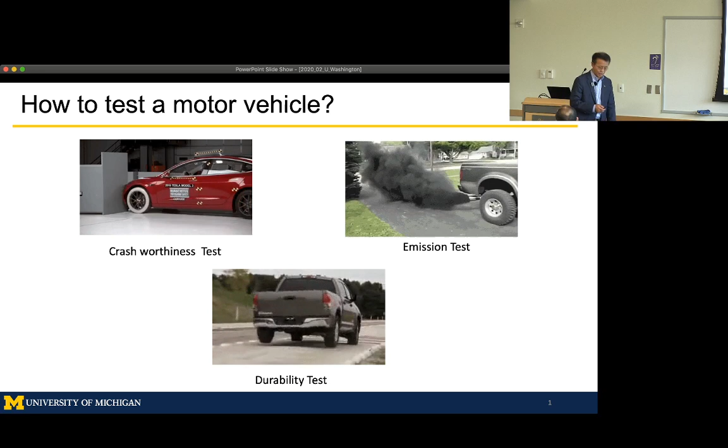At the same time, we also do driver tests, right? So for drivers, you first test your vision. Essentially, that's your perception system, and you need to know you have a good vision. You can see the objects on the road. We do written tests so that you know the traffic rules, so you have enough knowledge to guide you through the traffic flow.

And then the last one, you do have a road test, on-road test. So there's someone using a rubric that checks different things like parallel parking, turning, and things like that. So that's what we do in terms of driving performance evaluation and test. Now, think about automated vehicles. For automated vehicles, you don't have a driver over there, and now you want to put that automated vehicle into the traffic. Now, how are we going to do the test?

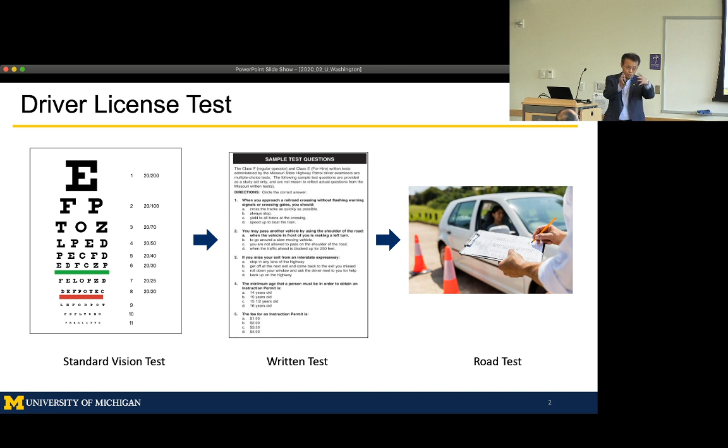So that brings the issue for automated driving systems. The ADS is a combination of the vehicle itself. There's still vehicle dynamics, vehicle characteristics associated with the car's mechanical systems. On top of that, we have this automated driving system, essentially replacing a driver and taking a driver out of the loop.

Now, when we talk about traffic flow, individual drivers really are the ones responsible for their own safety, mobility and things like that. But you don't have it anymore. You have this automated driving system driving in the traffic flow, whether this is all autonomous vehicles, or, particularly during the transition time, it could be a mixture of traffic flows.

So in terms of the test, not only do we still need to do the safety, the emission, the durability test of the mechanical system, now we need to test this automated driving system. And how are we going to do that? Are we going to do the vision test, the written test, the on-road test? How are we going to do that?

So the key of that is you need to put these automated vehicles, the automated driving systems, into a traffic context. So it's not just the vehicle itself. Because we're going to utilize this vehicle in a traffic flow, you need to test these vehicles in a traffic context. So this is very, very different from traditional vehicle tests, the test I was talking about.

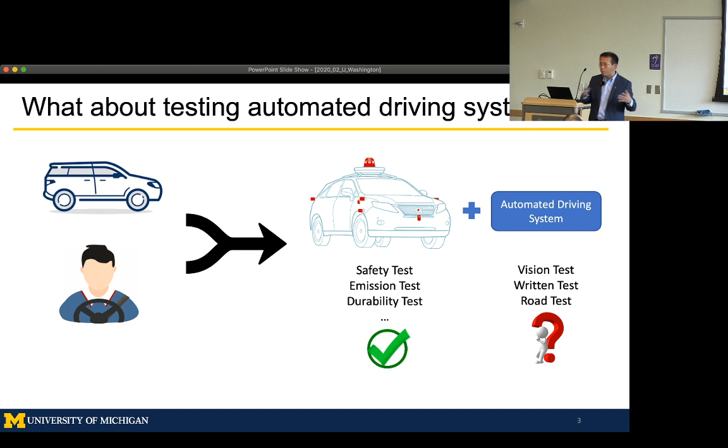I started this problem about 5-6 years ago when I joined University of Michigan, and I was one of the designers for the testing facility at the University of Michigan, and started to learn how we're going to do the test for autonomous vehicles. And I really found this is essentially a transportation engineering problem. There's a lot of knowledge from traffic flow theories that can be applied to the testing and evaluation of autonomous vehicles.

And I will show you some of that. So obviously, testing and evaluation of autonomous vehicles is important. Everybody is concerned about the safety and mobility of autonomous vehicles. I put down two of probably the most notable fatal accidents related to autonomous vehicles. You can argue in terms of the levels, but they are essentially being utilized as autonomous vehicles. One by Tesla in 2016, one in 2018 by Uber. They are highly automated driving systems.

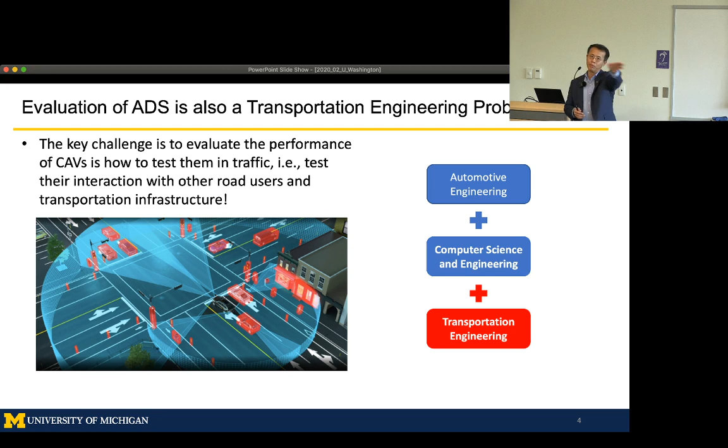So obviously, testing the safety, functionality, and mobility of these ADS is very important. How do we do the test, how do we assess these autonomous vehicles? Traditionally, I would say we have three established methods to test these ADS. First, by simulation. Essentially, you have a simulation model, you put your ADS into the simulation model, and this ADS will maneuver through the traffic flow, and you do it multiple times.

It's quite efficient in terms of how long you can drive. In a simulation, you can drive very long mileage. Waymo has logged billions of miles within simulation. But there's a problem with this simulation model: it may not be realistic. This is a simulated world.

The other extreme is on-road test. You put these autonomous vehicles on the road and let these ADS drive through the traffic flow. That's what AV developers such as Waymo and Uber are doing. They have developed these ADS and put them onto the public road to do the test.

And this type of testing is actually quite inefficient. Even Waymo, with such a large fleet, can probably only do not many miles. As far as I know, they probably have 10 million miles or something like that with their very large fleet.

And in the middle somewhere is the test facility. This is a closed test facility. You have an urban environment, and you can test these autonomous vehicles through this urban environment, but it's simulated. It's not a real city, it's a closed test track. So it's semi-realistic, but compared to the on-road test, it could be safe, because on-road tests, as I mentioned, could have accidents and create a public hazard.

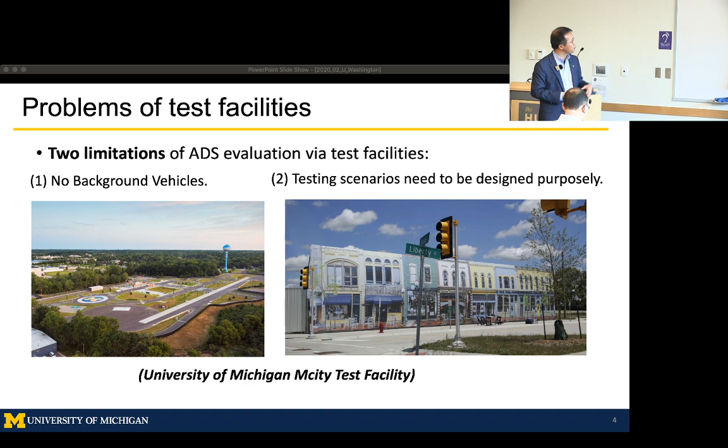Also, there are no testing scenarios. Because there's no background traffic, the autonomous vehicle can interact with the infrastructure; however, there are no other road users within the test facility. So these are the two major limitations for this type of testing facility. So one of my research projects, started 3-4 years ago, is to create what we call an augmented reality testing facility.

What we mean is, in addition to the physical testing facility itself, at the same time when we do the test, we create a simulation model for it. The simulation model provides all these virtual vehicles. For each of these simulated vehicles, we utilize their location, speed, heading and so on, and code that information into basic safety messages for connected vehicles. Then we send these simulated vehicle messages to Mcity, the real facility, to the real physical roadside unit.

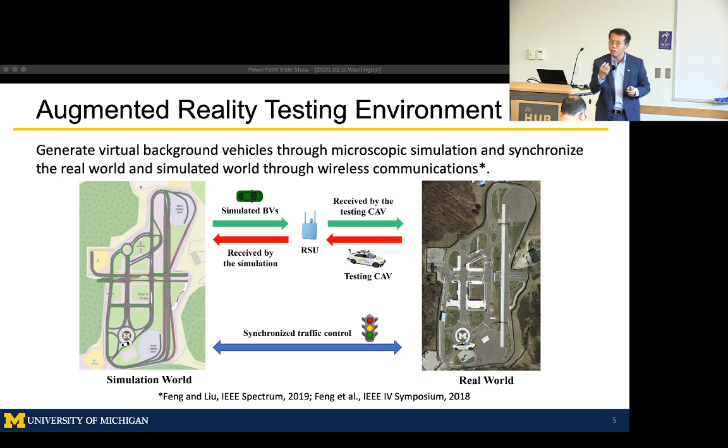The roadside unit will broadcast these messages at ten hertz, so every 0.1 second. The test vehicles will be able to receive this simulated vehicle information. Although they're driving in an empty facility, they receive all that information through the roadside unit. So we can create these testing scenarios, because we can manipulate all these simulated vehicles in terms of their location, position, speed, acceleration and things like that.

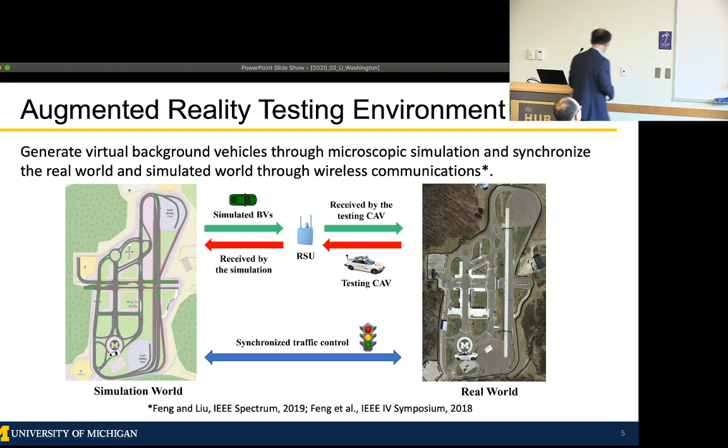At the same time, the real vehicles testing in the facility also control one of the vehicles within the simulation model. So within the simulation model, the ADS under test controls one of the simulated vehicles, and so it can interact with other vehicles in the simulation. So I want to show you a video. This is a video that shows you essentially what we did.

On the left-hand side, this is the simulation model, and on the right-hand side, that's the physical Mcity testing facility. In the top corner, that's the physical real testing vehicle. This is a level 4 ADS, autonomous driving system, driving in the real facility. In the right corner, that's the HMI within the autonomous vehicle, essentially the user interface for the safety drivers.

The yellow car you see is essentially this real car. It controls one of the simulated cars. This car actually interacts with other simulated vehicles, and this real car will need to react to them. So this is one of the scenarios we test. This is a real test.

To actually test the functionality of their reaction to red light running. So we need to tune the parameters for the red light running to see whether this vehicle will be able to really respond to vehicles that actually run the red light.

So you can see that's our vehicle. This is one of the scenarios I just showed, and you can see this vehicle actually stops over here, waiting for other vehicles to pass by. This is a real vehicle; although you can see there's nothing over there, it receives the information. And now the next one is a red light running scenario.

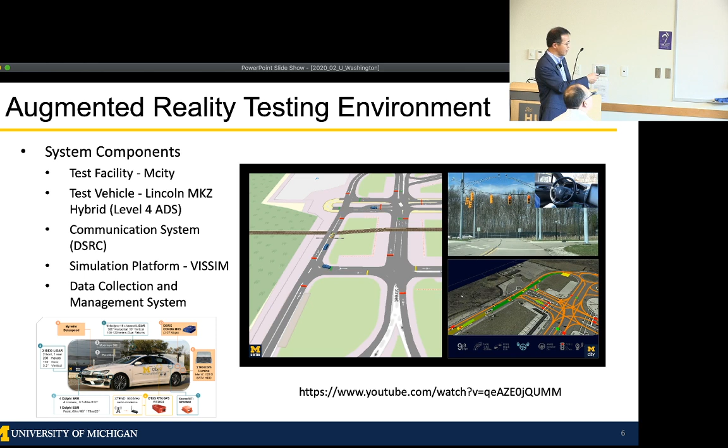Okay, so within the simulation, you can create all sorts of scenarios. For example, we actually create a simulated train, and in the facility there is a railroad crossing, and this vehicle actually needs to wait until the train passes by, and then the vehicle will be able to move. And if you want to see those, this is actually on YouTube also, so you can find it on YouTube.

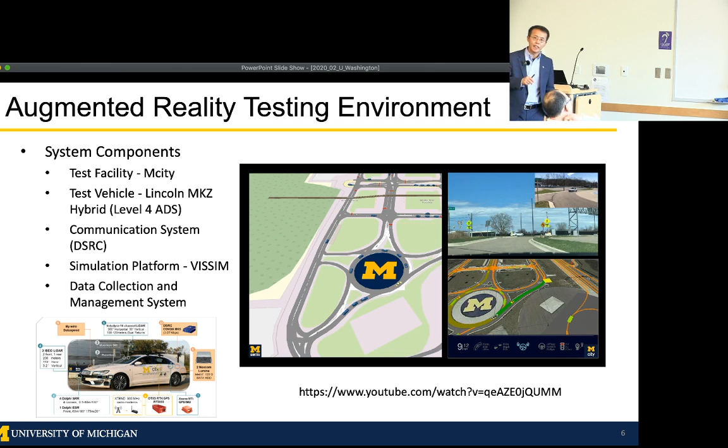So that's one. The second thing we need to do is to create these testing scenarios. This can be utilized not only for the testing facility, but also for simulation. Now, if you look into on-road tests, if you want to enumerate the scenarios, it's impossible. There are so many scenarios. And by human driving performance, in 100 million miles we have one fatality. So even with so many dollars into ADS development, we don't come anywhere close to these miles. So we need to be able to accelerate this type of testing by creating significant or critical scenarios.

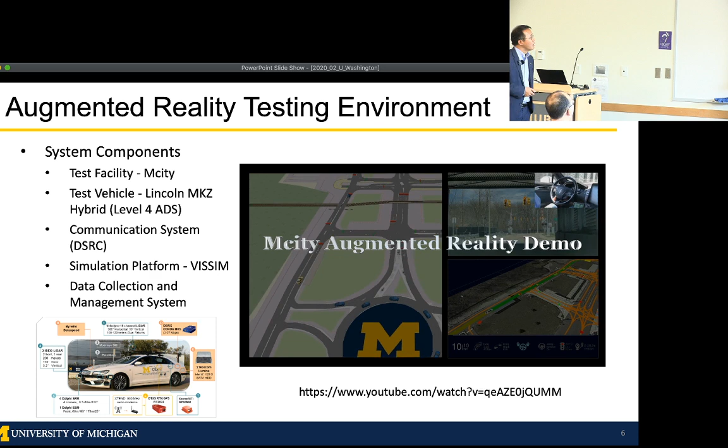So if you want to test all sorts of scenarios, there are a few things you need to consider. One is the behavior competencies in terms of driving: whether they will be able to cross the intersection, whether they will be able to stop at the stop sign, and things like that. So there's a list of behavior competencies you have to test. There's a list of different situations: there's sunshine, there's raining, and there's different geometry, different roads. And then there are also different scenarios.

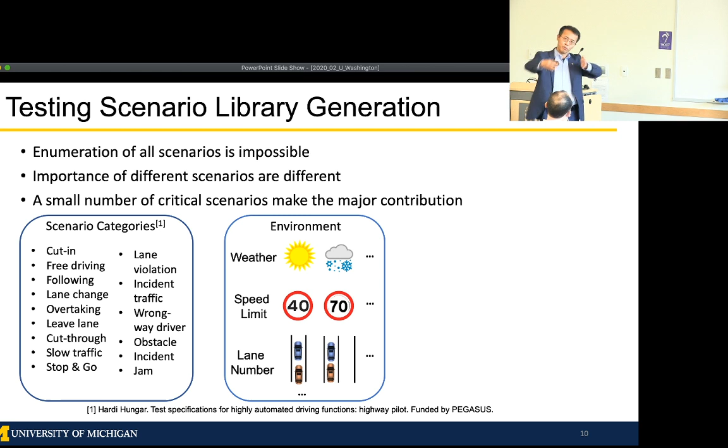So even in the same scenario, let's say the cut-in scenario, the vehicle cutting in front of you, there are different cut-ins. The range and the range rate between the host vehicle and background vehicle can vary very much. So all of these need to be considered. If you want to enumerate that, the mileage to do the test is just so much. So what we do is generate what we call critical scenarios. If I use this to represent the scenario space, all sorts of scenarios we need to cover, what we want to do is only test a small number of scenarios, but these scenarios have significance. These are what we call critical scenarios.

So in order to do that, the first thing we need to do is to define what is critical. What is the criticality? By definition in our context, what we propose is to look at two things. One is maneuver challenge, meaning this is a challenge to the ADS. If it's not a challenge, then it's probably not so useful to do the test. For example, if we test car following performance and the car is really far away from you, this type of car following is not very challenging. It's not very useful to do the test. So you want to test the level of the challenge.

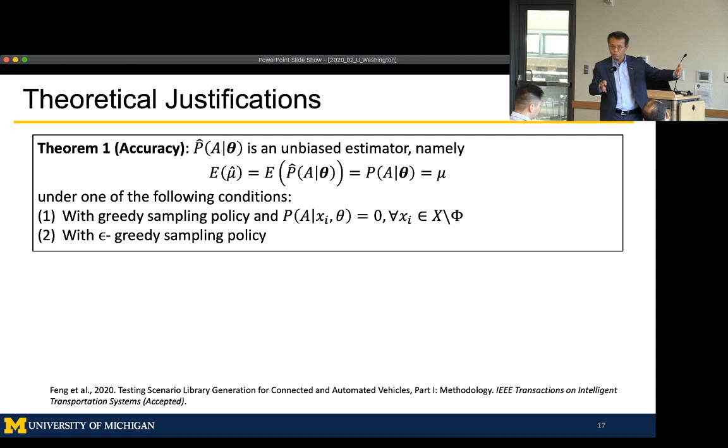And the difference actually will essentially enlarge this variance. When they enlarge the variance, then essentially we'll have to make more samples out of it. And so if we know exactly that ADS, then we know the model, then the sampling size will be even smaller.

So then with this sampling technique, we can develop this type of framework. One is we need to generate this library of scenarios, and I'm going to show you some of the examples. Once we generate this library of scenarios, we sample from this critical scenario set, and then perform the test either in the simulation or in the testing facility. That's what we do. Okay?

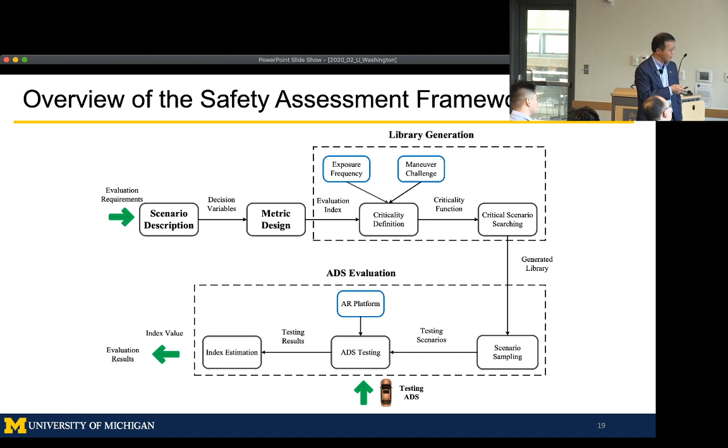I'll give you 2 case studies. One of the case studies is a simpler case, lower dimension case. This is a cut-in. You have an ADS, you have a vehicle cut-in, and you want to see this ADS performance. So this is a lower dimension. I will show you why it's lower dimension.

The other one is the car following. So if I follow the car for a certain period of time, then for each time instant, you can control the range and the range rate and speed of that background vehicle. This becomes a very high dimension. So we want to show you how we do this by applying this framework.

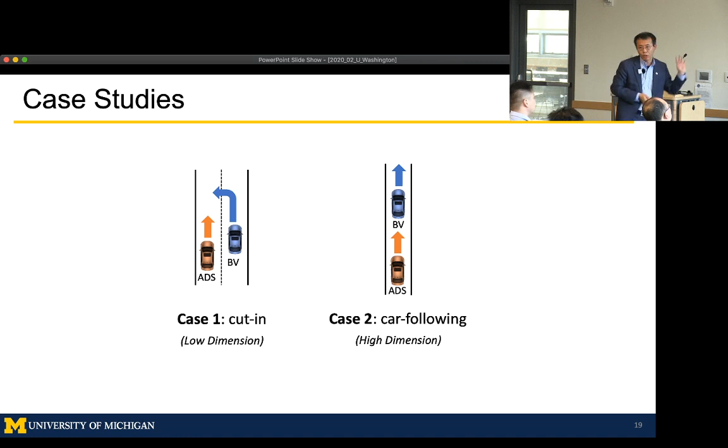And the data we utilize is 2 databases. One of the advantages at University of Michigan is that because we're in the backyard of our automotive industry, we work a lot with these OEMs. And so there's 2 big databases within our Transportation Research Institute. One is what we call Safety Pilot. This is one of the largest connected vehicle testbeds in the city of Ann Arbor.

And some of these vehicles are not only equipped with the onboard unit, so they can communicate with the roadside, but inside of the vehicle they also have Mobileye, they have radar, they have LiDAR systems, so they can collect data from the surrounding traffic as well. So about 140 of these vehicles are actually equipped with Mobileye and our data acquisition system.

And there's another database, what we call the IVBSS. This is in the 1990s, there's a group of vehicles being tested, and some of the vehicles have radar and also LiDAR systems installed, so we can actually know the surrounding traffic as well. So both these databases can be utilized to help us generate these exposure frequencies in terms of these scenarios.

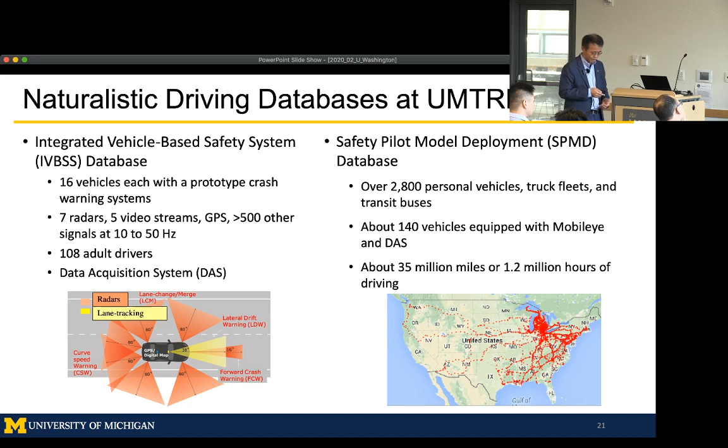And then now we need to search all of this big space. We need to search these critical scenarios. A lot of these scenarios, the criticality is 0 because they are very safe, so these are not very important to us. So what we want to do is search those scenarios with higher criticality.

And because the space is big, and we don't know where we will have these critical scenarios, we want to develop these auxiliary objective functions to guide us to select those scenarios which have a higher criticality value. And the way we do it is to consider both, obviously, maneuver challenge as well as the frequency. The maneuver challenge in this case, because it's just a simple cut-in, we're looking at time to collision. Okay, and this is a little bit modified time to collision measure, because when it's negative, it becomes useless.

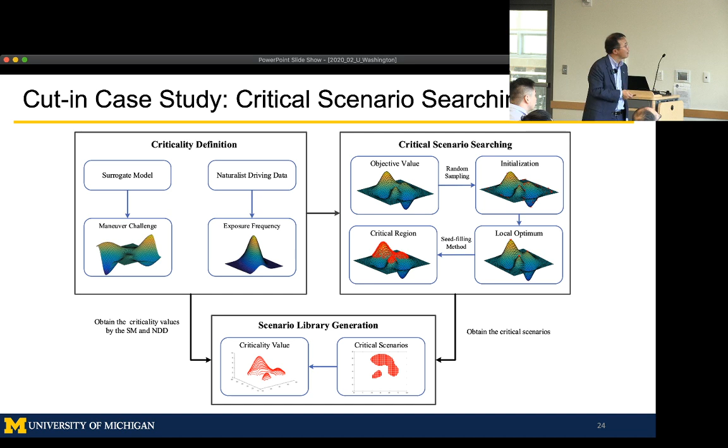And so what we utilize is the Safety Pilot database. The Safety Pilot database has been running starting from 2012, and up to now it has been 8 years. So we get lots of data. And we query one scenario, which is this sort of cut-in lane change scenario. And we utilize about 400,000 of these data.

We look at, during these cut-ins, what will be the range and range rate distribution. And here shows you the distribution of these. Obviously, in a lot of the cases, it is somewhere around 0, which means the speed difference is very small. The range could be very different. So this is a highly frequent scenario. And for all other scenarios, we look at the distance between this specific scenario to this omega zone. And that gives us the frequency measures.

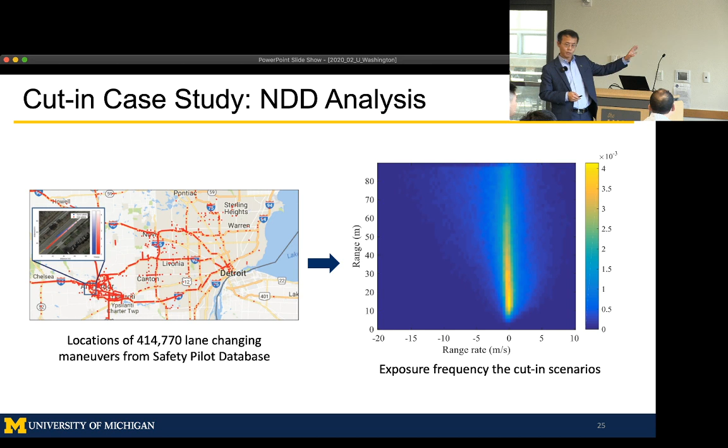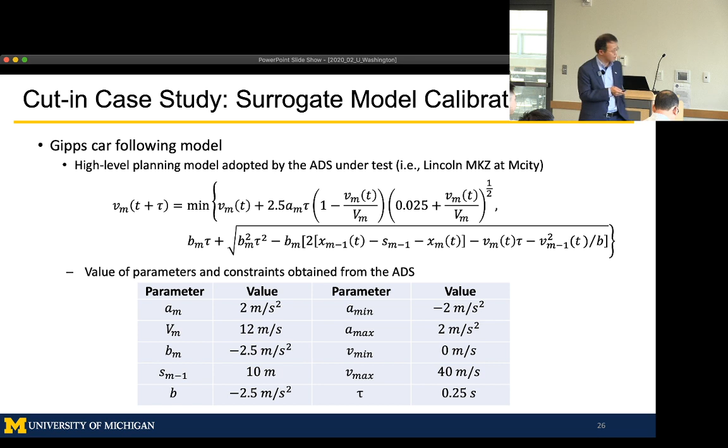And then for the surrogate model, we utilize the Gipps model. It's a car-following model we all learned, the GM model, the Gipps model. There are a lot of car-following models we have discussed in traffic flow theory, and we use a Gipps model for this case. And then, so this is the exposure frequency. And by utilizing the Gipps model, we can evaluate the safety performance by simply looking at whether there will be an accident created.

So you can see that for the same parameter, we can calculate whether this is safe or not safe. Not safe meaning an accident occurs. And if you take a product of these, then that gives us the criticality measure, and this becomes a small set of scenarios. We sample all of that, and then we do the test.

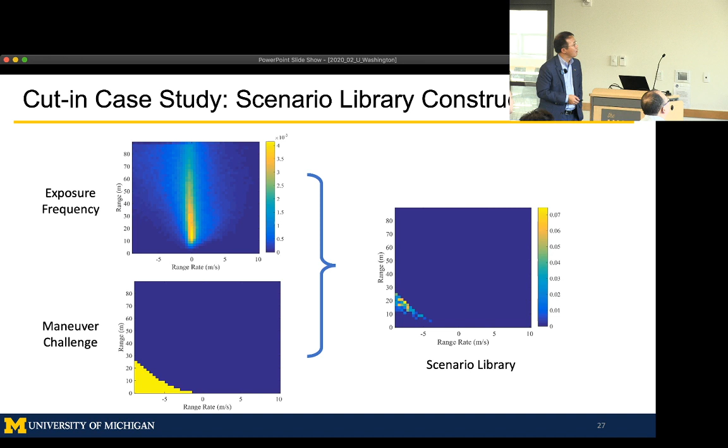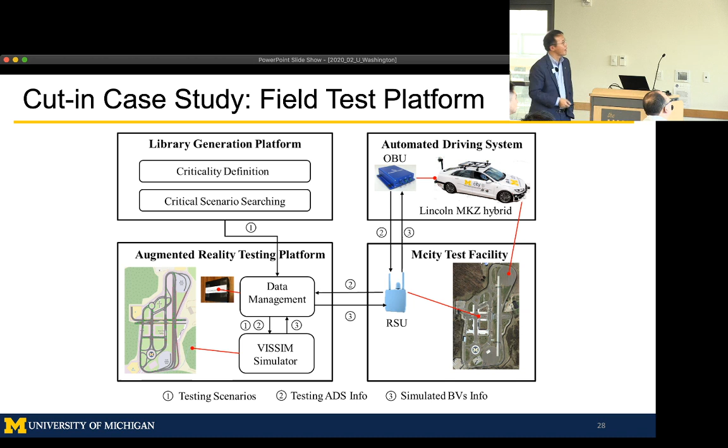For this particular test, we actually tested in the Mcity facility, and we used a real vehicle. And this is the testing facility. This is the augmented reality we have been talking about. This is our library generation. So we generate this scenario, we sample from the library, we put it into a simulation model so that we can generate background vehicles, and then we put it into the test. And this is actually an execution of this field test.

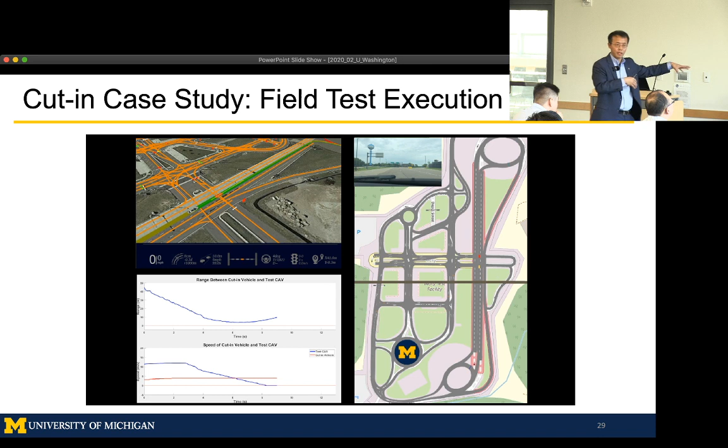So this is a cut-in scenario. And again, this is simulated Mcity. This is the driver's HMI. And if you can see, this is the host vehicle, and there's a simulated vehicle cutting in. And the parameters are governed by the testing scenario library. So we sample from the library, we put it into the simulation, and then do the test.

And the first test you just saw, there's no crash at all, because you can see the range and the range rate, there's a range over there. And for this particular case, it is almost a crash, a near-miss situation, because the distance between these two, the range, becomes very, very small.

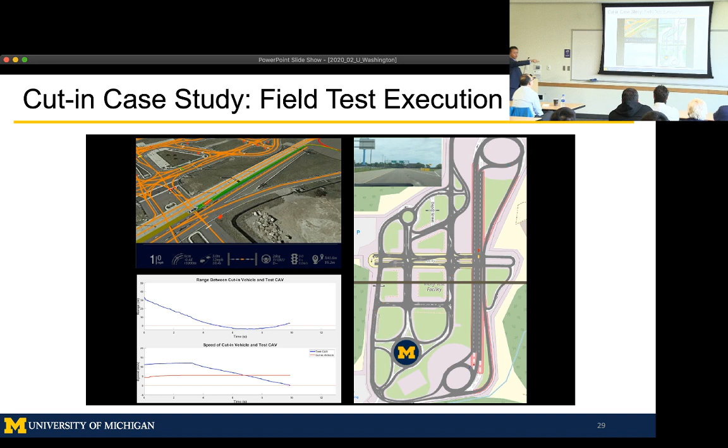So the third scenario, there's a crash, and you can actually see from here. This is the following vehicle. This is the vehicle in front, and the distance between the two becomes negative, meaning they bumped each other already. Okay? So this is how we did the cut-in low-dimensional scenario test.

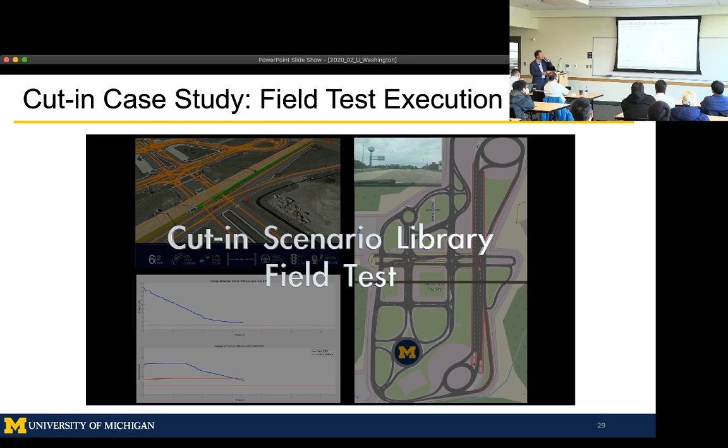The next one is a little more complicated. This is the car-following case. The car-following case is actually seemingly very easy, but if we want to have a scenario for a long period of time, let's say 30 seconds, and every second or every half second I need to control the range and the range rate between these two vehicles, then the dimension is very high.

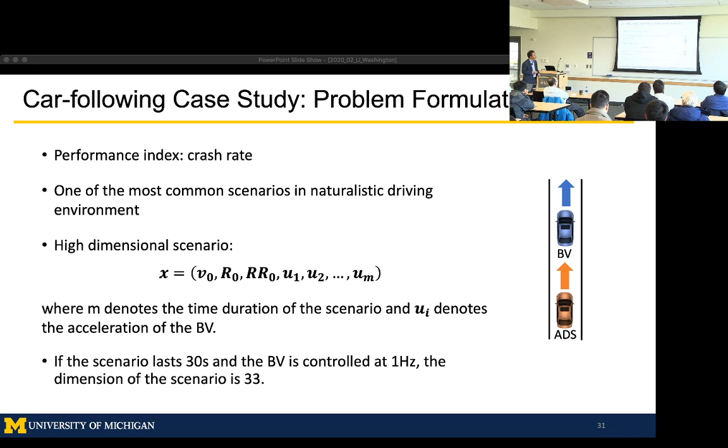And with that high dimension, as I mentioned, a lot of these scenarios are very safe scenarios, 0. So I need to be able to find those scenarios with higher criticality values. So to do that, what we do is we develop this MDP process, the Markov decision process. And for this, the state defined here is the background vehicle speed, the front vehicle speed, the range and the range rate. That's the state in terms of the car following.

The action is the acceleration rate of that background vehicle. So the acceleration rate, meaning they could decelerate, they could accelerate. And now we define a state action pair by looking into both this exposure frequency as well as the maneuver challenge. By exposure frequency, what I mean is this is the state, and at this state, the frequency of that action, the probability of that action. And this is, given that state, given that action, what the probability of an accident occurring is.

So again, if it's a longer range, even taking the action, the probability of an accident occurring is very small. Those are not very critical scenarios for us, or not challenging scenarios. And I use S over here because I use a surrogate model. If it's A, meaning this is on-road test, or simulated on-road test. So I create this pair, and then now you have a sort of a decision tree.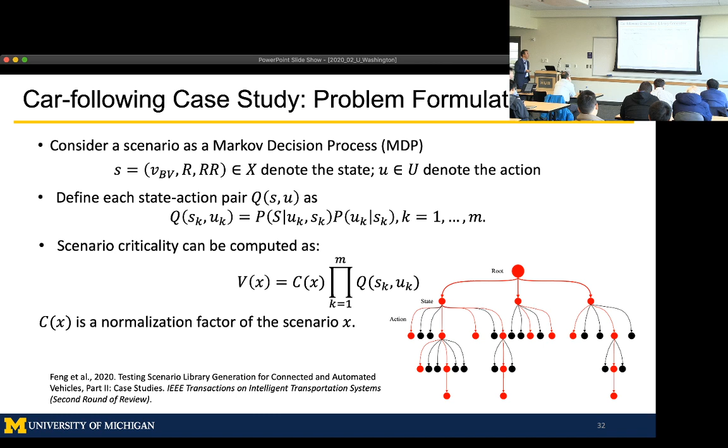And then for each of the scenarios, you essentially go from the root to a leaf by doing this state action pair. And so the probability will multiply all together for that specific scenario, the criticality measure. And we can actually prove that if we do so, then essentially this recovers what we have defined in terms of the criticality measure. And so to learn, because again, the scenario space is so big, a lot of these scenarios are just 0. So we need to find these critical scenarios.

So what we do is we utilize reinforcement learning to learn what the critical scenarios are. So if an accident occurs, we get 1. That's the reward. If no accident occurs, we get 0. So we run it multiple times to train the model and to memorize the scenarios which might generate higher criticality values. Okay? And so this is what we do in a very large space. Now we have this critical scenario space, which is generated by this reinforcement learning model. Now we can compare in terms of the difference.

And we actually utilize one of the ADS models, from my colleague Hui Peng's group's work, utilizing an adaptive cruise control model plus the AEB, which is the autonomous emergency braking model, to control that background vehicle, and compare scenarios generated from the on-road test with this critical scenario library we generated, sampling from both and comparing their performance. And you can see the half-width, which gives us the confidence levels for this NDD.

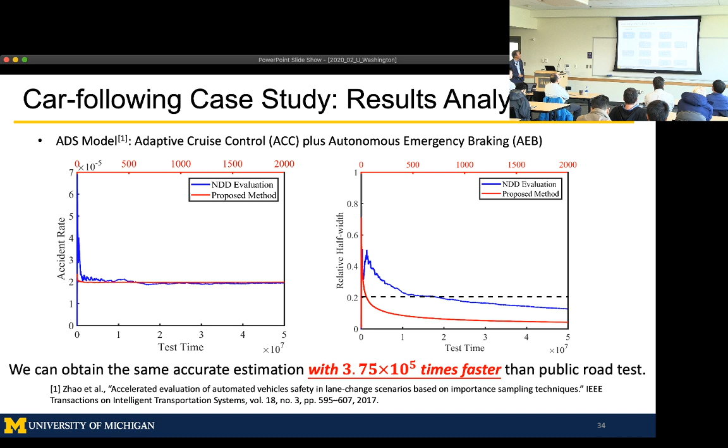This is naturalistic driving situations, and you need to run like 1.5 times 10 to the power of 7 times. But if you utilize the generated library, with the technique we just discussed, this is less than 100 times. So the acceleration of this testing is very, very significant. Okay? So that's sort of the work we have been doing in the last few years.

This work has been going on for 5 years or so, and we haven't published any of it. The first paper just came out this month in the IEEE Transactions. And there's a part 1 paper and a part 2 paper. The part 1 paper talks about the methodology we have developed, and the part 2 paper discusses a few case studies, which include the cut-in, the car following scenarios and things like that.

And there's a number of projects we're also working on in this space. One is to look into how we can enhance the augmented reality. The augmented reality right now is simulated vehicles, and these vehicle messages being broadcast within the Mcity, but we can only test the planning algorithm. We can't really test the perception. Remember, for ADS, there are three critical components. One is perception, one is planning, one is control. The current augmented reality can only test planning.

We can't really test perception, meaning we don't see how well this car can sense the surrounding world. And to resolve this issue, we need to add sensor simulation to it. So we're adding sensor simulation into this augmented reality testing environment to create an integrated driving simulator.